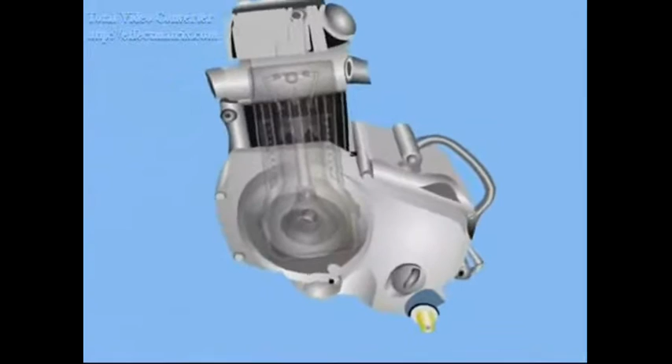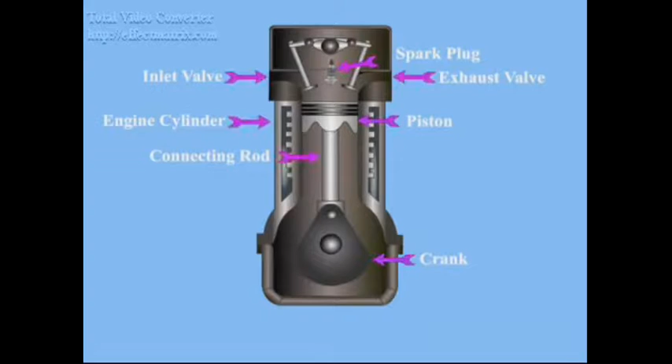Hello friends, everyone knows what a motorbike is. But how many of you know the working principle of a motorbike and its engine? In this presentation, we will give you a brief explanation of the working principle of a 4-stroke petrol engine, which is also known as IC engine, that is internal combustion engine.

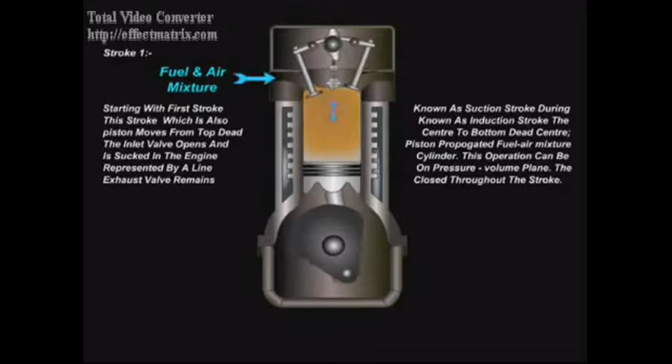The first stroke is known as suction stroke, also known as induction stroke. During this stroke, the piston moves from top dead center to bottom dead center. The inlet valve opens and the piston propagates the fuel-air mixture sucked in the engine cylinder. This operation is represented by a line on the pressure volume plane.

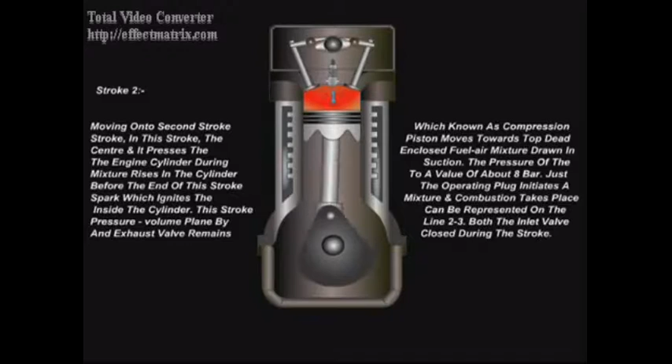Moving on to the second stroke, known as compression stroke. In this stroke, the piston moves towards top dead center and presses the enclosed fuel-air mixture drawn into the engine cylinder during suction. The pressure of the mixture rises in the cylinder to a value of about 8 bar. Just before the end of the stroke, the spark plug initiates a spark, which ignites the mixture and combustion takes place inside the cylinder. This stroke can be represented on a pressure volume plane by line 2-3. Both the inlet valve and exhaust valve remain closed during this stroke.

Now let's see the third stroke, known as working stroke. When the mixture is ignited by the spark plug, gases are produced which drive the piston from top dead center, storing energy during this stroke and supplying it during the idle stroke. The expansion of gases is shown in the pressure volume diagram by line 3-4. Both valves remain closed during the start of the stroke, but when the piston just reaches the bottom dead center, the exhaust valve opens.

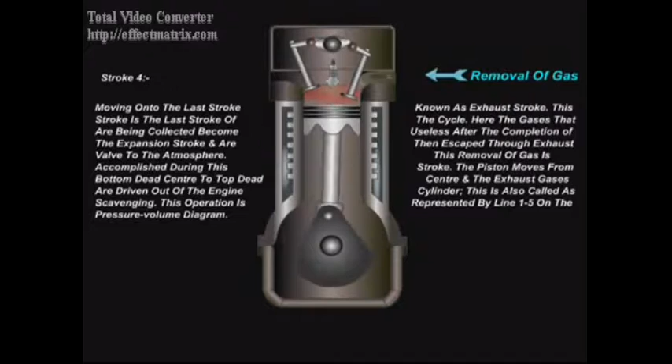Moving on to the last stroke, known as exhaust stroke. This is the last stroke of the cycle. Here, the gases collected become useless after the completion of the expansion stroke and are then escaped through the exhaust valve to the atmosphere. This removal of gas is accomplished during this stroke. The piston moves from bottom dead center to top dead center and the exhaust gases are driven out of the engine cylinder. This is also called scavenging. This operation is represented by a line 1-5 on the pressure volume diagram.

With this, we come to an end to our presentation. We hope that you all have understood the working of a 4-stroke petrol engine.